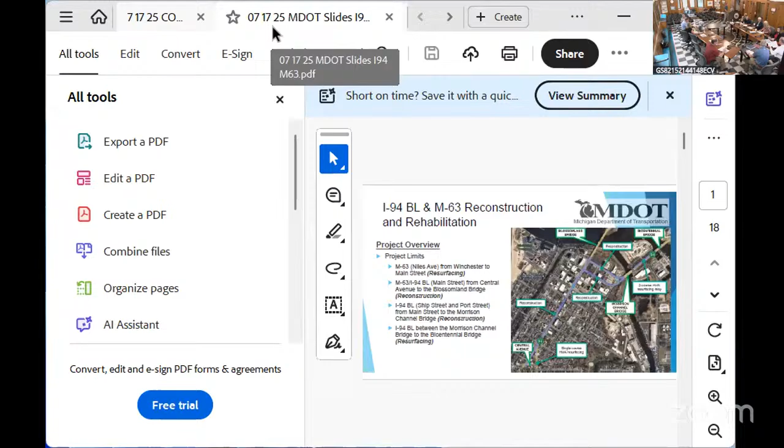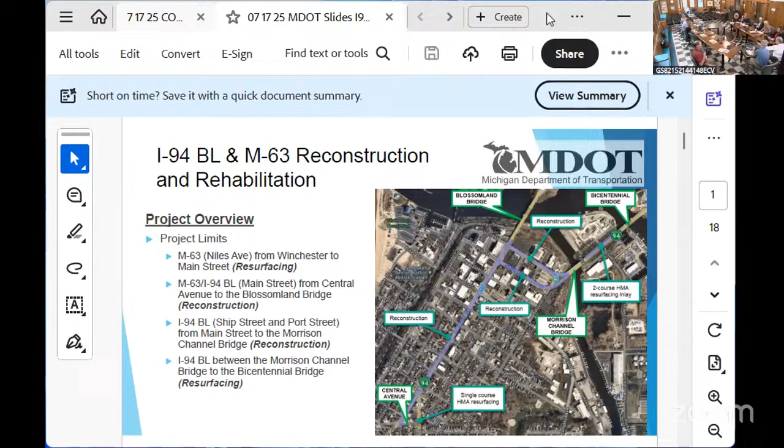Mr. Chair, while Mr. Smith gets ready, you all are going to hear about MDOT's planned reconstruction of Main Street outside this window. The MDOT team has been kind enough to include a variety of county departments through their pre-planning process and public engagement. Between myself, Don Trail, Carrie Smetanka, and representatives from the Sheriff's Office, we've been watching this design come together. This is an absolutely massive project that will impact county admin. It'll impact the courthouse, the Sheriff's Office, and even the Equalization Department.

As a result, knowing that there's so many impacts coming, Mr. Smith was willing to come and provide an update on behalf of MDOT. He'll walk you through what is being planned, and then my hope is that

All right, good morning. Thanks for having me. My name is John Smith. I'm the MDOT project manager for this future St. Joseph project that we'll be talking about today. I've been at our MDOT Coloma office since 2005. Started there as an intern, hired in full-time after college. Went to Western Michigan University. Born and raised in the Coloma area.

So despite what a lot of people think, that MDOT comes down from Lansing, says what we want to do and walks away from it, I was born and raised in the area and frequent St. Joe a lot for different things. So I have a vested interest here, as well as the other individuals from MDOT out of our office that are involved in this, who also live and work in the area.

So today I'm going to go through a high-level discussion on what this project is, give you a quick glimpse of what we've done on this project so far, a little bit of what we've been working on recently, and then where we're going in the future. Everything I'm going over today is what we've been rolling out in our public meetings as well as stakeholder meetings. It'll be a good overall refresh of the project if you haven't paid attention to it thus far.

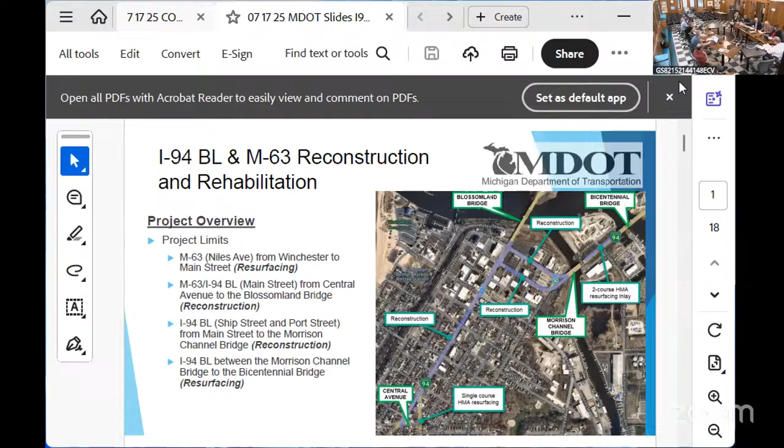Oops, find the right button to click here. Too many.

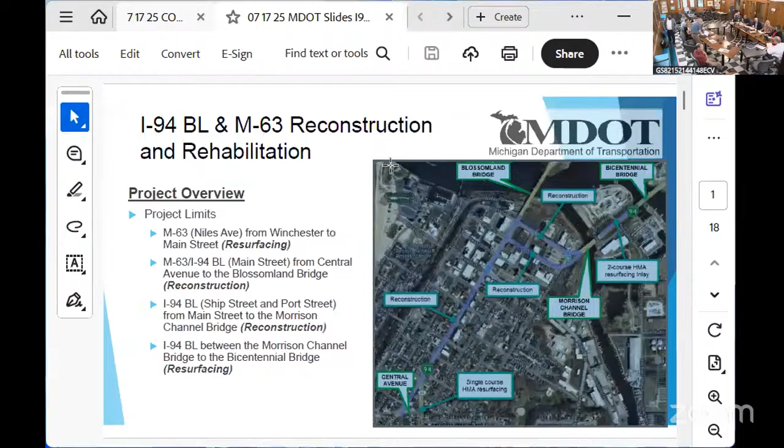So just before I get too far, I missed one thing. When I say reconstruction, we're replacing everything under the road as well: storm sewer, sanitary sewer, water main. We're doing operational changes, streetscaping, traffic signals, the whole kit and caboodle.

So again, we're pretty much going to be redoing everything from the ground up out here along Main Street. It's due. The concrete's 1950s concrete. It's lasted well past its prime. It's been repaired many times, and it's time to get into that underlying layer and also replace a lot of the municipal utilities as well.

But now getting into the schedule, I'm not going to get too detailed on this. This project's been ongoing in some form since basically early 2020. Had a discussion with City of St. Joseph at that point in time. They obviously have some vested interest with the roads in their community. So we sat down and said, where do you guys want to focus for the next project that we have with MDOT? Main Street rose to the top of the list. This is right through our downtown, we want to focus on that.

So at that point we did some real high level scoping, basically investigation, looking at what we wanted to do on that project, how much it might cost, when could we get it into our 5-year program. Between 2020 and mid 2023, kind of a hiatus time frame, got it in the program, waiting until we could get our funds obligated. At that point we split this project into 2 phases: EPE, early preliminary engineering, and PE, preliminary engineering.

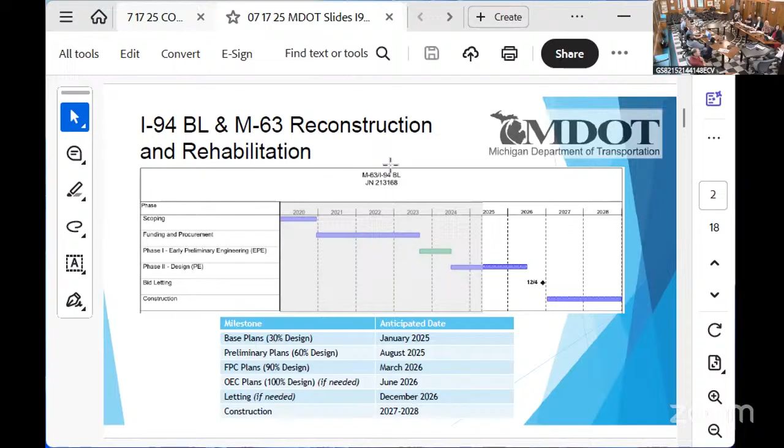Now, looking back at where we've been to see where we're going. That EPE phase, early preliminary engineering, started in 2024. That consisted of 3 advisory group meetings, 2 public meetings, and a public survey with 875 responses. My consultant team said they've never had a public survey for an MDOT project with 875 responses before. If we'd gotten 50, we would have been ecstatic. And all of a sudden it's 875.

So we actually had to cross-reference and make sure there weren't some weird AI bots going on. But it was all legitimate responses by people from the community, and a lot of them were residents that we got feedback from.

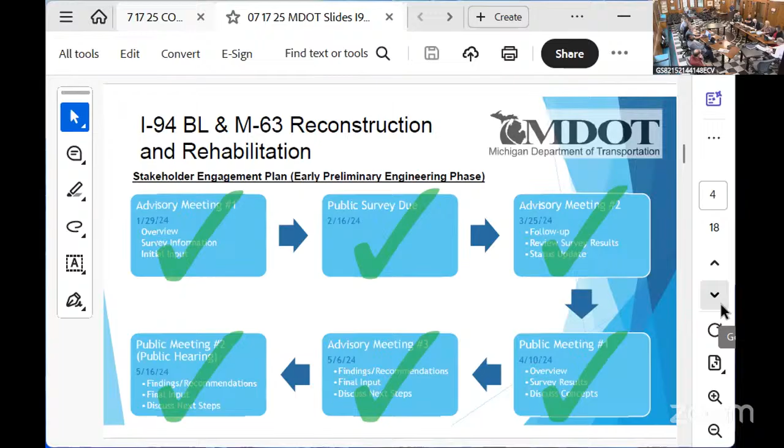Now going into our design phase, which we're in now, which kind of started in late 2024. Again, we're to today. We've done our base plans. That's what we call line and grade. That's 30% detailed. We're kind of laying out where different things are going to go. Following that, we had another advisory group meeting. Then, following that, our 3rd public meeting.

And then as we kind of got to that point in time, we were starting to think about, hey, how are we going to build this project? What's going to make the most sense, give us the best product, get good costs for us, different things along the lines of that. And so we actually advanced, that's why there's the little blue and red arrows there on the right side of the screen. We kind of advanced another advisory group meeting as well as a public meeting to kind of roll this out and show, hey, here's the options that we're looking at, and this is what our recommended alternative is.

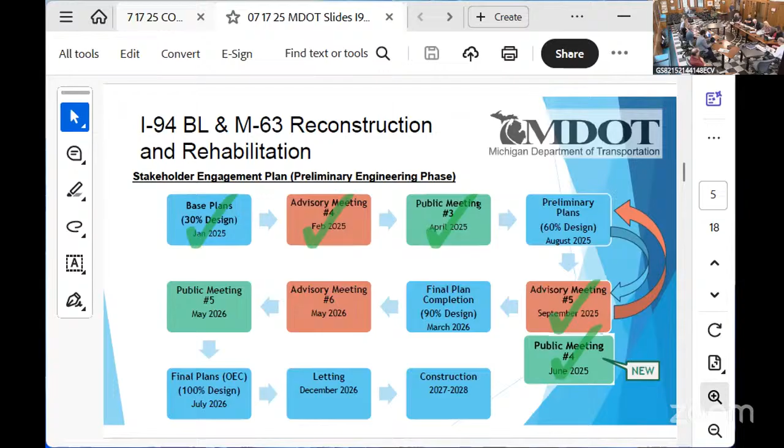Again, just kind of showing how things have progressed a little bit throughout. One of the big things that we heard in our survey that we really looked into was the safety of pedestrians and everyone that frequents this corridor, especially these pedestrian crossings. A lot of people are going from one side of the main street to the other. So we started looking at, hey, what makes the most sense as far as pedestrian crossings out here? As you look at it today, there's a lot of crossings that might be 50, 60 feet wide with no refuge in the middle of them. They're not at a signal, so they're not really protected.

So the one thing that we want to hang our hat on, we're going to eliminate any uncontrolled pedestrian crossings along Main Street that is not at a signal or does not have some sort of a refuge. That's where we feel that we can provide the safest crossings for people. And again, myself crossing a street is going to be different than somebody like my parents crossing the street, is going to be different than a young family crossing the street. So we're trying to look at that overall as far as what makes the most sense for all users crossing the street. So this was our initial graph that we're looking at. Okay, we're going to eliminate some crossings where we don't have them protected either by that refuge island or they're not at a signal.

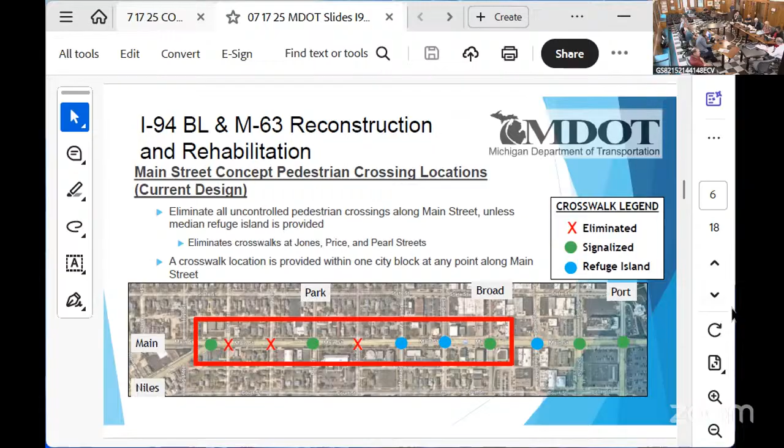Basically, we redistribute some of the left-hand turns out there. We can put some additional refuge islands, which, if you want to high level think refuge islands, it's like the median planters out here, but you have a crosswalk going through them. So somebody can stop part way and look the other direction and then proceed across. So redistributing through there, we end up allowing crosswalks at every crossing in some form or another, with the exception of Jones Street. And the only reason why we didn't look into that one further is that it is so close to the Niles Avenue intersection. There's only so many ways that you can make that one safe.

So that one we're actually going to be redoing a little bit. You'll see on the next screen, extending a little median through there to cut off some traffic movements to try and make that overall intersection safer. But other than that, you're always within a block of a crosswalk to get across the street. And they're always either going to be at a signal or have a refuge island there to proceed across.

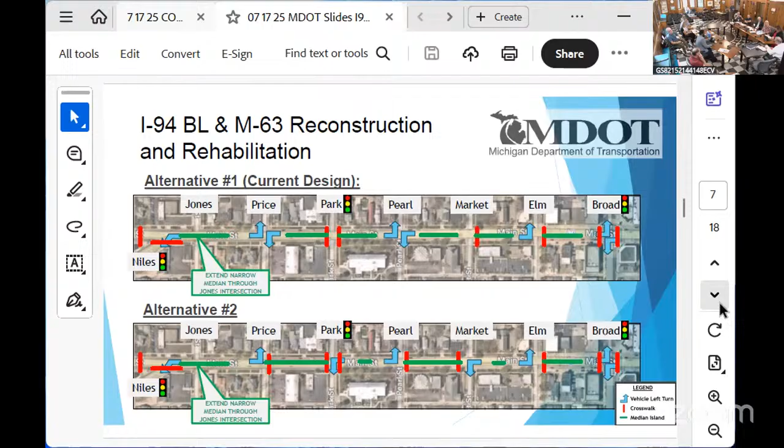So again, this is the Jones Street one, just high level, hitting on this. Again, the red line there, kind of right in the middle of the screen, that's showing the extending of that little concrete island all the way through. Now, people can't cut straight across Main Street there. They can't necessarily come from Jones and turn left to head either direction. But it again kind of helps with the overall operations of this.

The one thing that I'll add here with Jones Street as well, it's kind of in that top leftmost little box there, is we are actually going to be looking at adding an extra southbound left-hand turn on Niles Avenue. If anybody's driven through there, that left-hand turn gets backed up pretty good. Right now, it's kind of just hatched out because there's just extra pavement there. So we're going to be looking at adding another left turn there. So you'll have dual left-hand turns, kind of similar to what you have on Niles Avenue northbound, taking the right-hand turn on the Main Street.

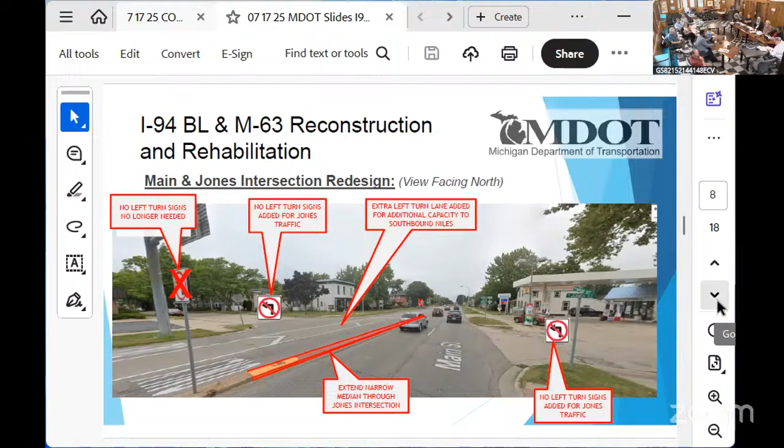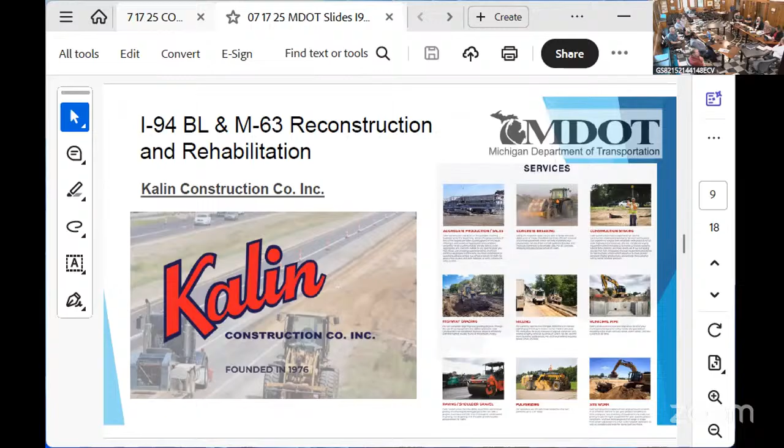Next, giving a plug for Kalin Construction. You're probably wondering, why is the Kalin Construction sign on here? That's because we're doing something a little bit different with this project, trying to think outside the box. Coming into this project, we're like, hey, this is going to be a very impactful job for the community. There's a lot of things going on. We're right by the river. We got 2 lift bridges, deep utilities that we're going to have to do. So the one thing that we did on this project that we don't typically do on road projects is we went with this construction management general contracting method.

And basically, the quick and dirty of it is we bring a contractor in during design and they're a part of the design process. We can get feedback from them. They can tell us, hey, this is how I would stage this work. This is an issue that we might foresee in construction. They can give us feedback on what the schedule might look like. Again, all those things, an ounce of prevention is worth a pound of cure. So there's a little bit extra cost to have them on during design, but it also will save a lot of things later on.

At the end of this whole process, we also have what we call an independent cost estimator on board as well. It's another contractor consultant that has worked on jobs. They're along the way as well, seeing everything that we're talking about with the contractor, providing input. They're looking at pricing, different things to make sure at the end of the day we're getting a good, honest price from our contractor.

And then at the end, we start doing the negotiation process with the contractor. And if we come to an agreement with the contractor, which is Kalin right now, we move forward with them right into construction. So the one that we've had on through all of design goes right into construction. Great teamwork and partnership at that point in time. If for some reason we can't come to an agreement with that contractor, then we put this out like our normal bid process, and Kalin can bid on it like anybody else at that point in time. And it would go to our normal low bid type process there. But again, having them on during design is worth its weight to get all that information up front.

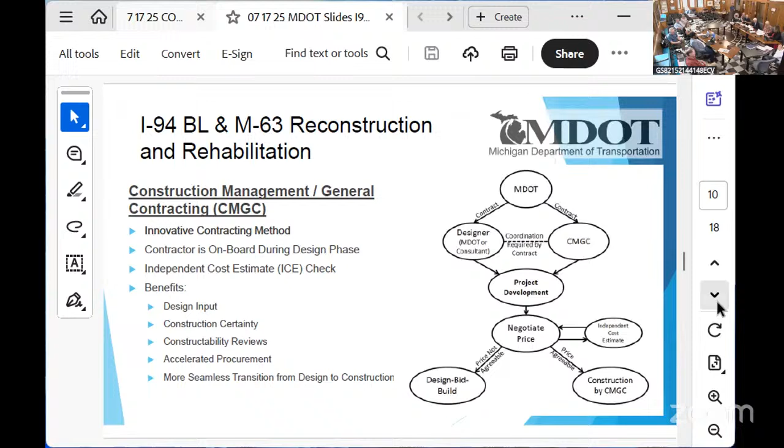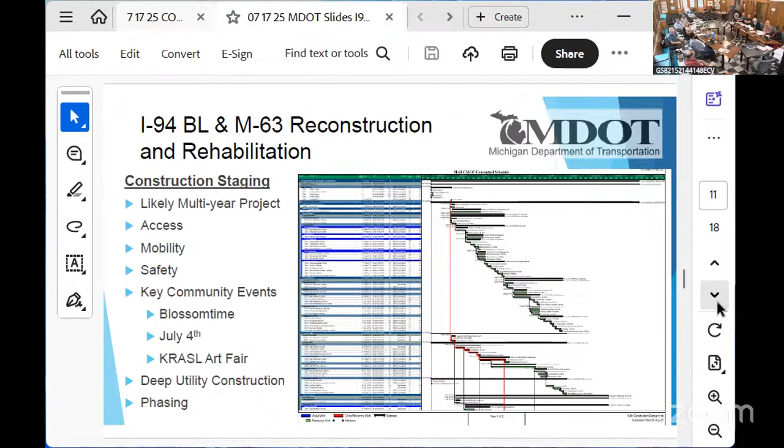So as far as construction staging goes, I'm not going to hit on all those bullet points there. But these are a lot of things that we're taking into account as we're looking into it. Again, right in the downtown area. Access is a big thing. Again, there's a lot of deep utility work that we're going to have to work through. How are we going to phase this to still provide that access? We have community events, how are these things to be done? These are a lot of the parts of the discussion that we've had as far as the contractor goes.

So the most recent public meeting that we had, the biggest part of it was rolling out construction staging. What was considered and what is our recommended alternative? So the next couple slides here kind of show the different alternatives that we looked at, pros and cons to everything in life, right? So alternative one was part width construction.

Basically working on, for instance, out here, we'd be working on southbound, maintain traffic on northbound, then flip flop. Seems pretty easy, right? It's good, but once you start thinking about the underground and sanitary sewer leads, storm sewer, water services, different things like that, it becomes a little bit more difficult. How are we going to get those across the road to the other side in an efficient way, making sure we got good quality, different things like that.

I mean, those are things that come up in our discussions, and we're looking at different options that we would have. Also, how far away is that work zone going to be from our workers? Obviously we want a safe work zone for both the workers, pedestrians, and motorists that are going through this area.

Also right now, as you all are aware, it's 2 lanes each direction, northbound, southbound. This would be taking it down to a single lane each direction, northbound, southbound. When the bridge goes up, Niles Avenue may become a parking lot at that point in time. You're also taking away the center left turn lane, and if one person tries to do something different and tries to turn left to make their life easier, it could back things up. So it's a lot of these different things that we're weighing there.

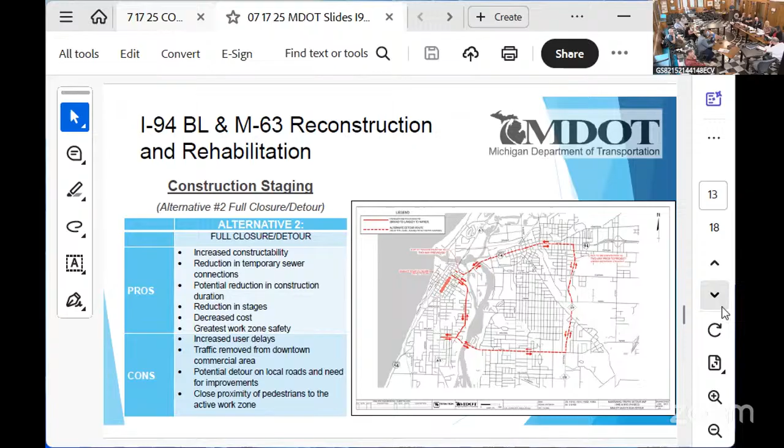And then the last one, this is very similar to that part width construction, is a directional detour. We can maintain 2 lanes of one direction of traffic, and then we would have to detour the other. Again, I think the pros and cons on this one are very similar to the part width construction one. You still only have half the roadway that you can work on at a time.

You're maintaining traffic. The bridge goes up. You may have more capacity at that point in time for having two northbound lanes, but it still may stack up a little bit. So, again, pros and cons there.

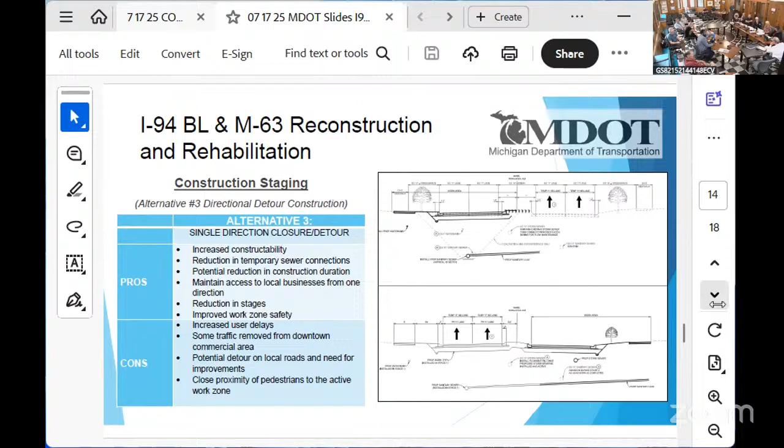So we'll fast forward. Overall, weighing the three alternatives that we had, part width, full closure and detour, and then the directional detour one, our recommendation is we go with alternative 2, which is the full closure and detour. Again, this allows us to shorten that construction from possibly 2 full construction seasons, which is what both alternative 1 and 3 would be, to about a season and a half.

And with that season and a half, we would also get into the downtown area, which we kind of identify from Elm up to the Blossom Land Bridge and Port and Ship Street there. We would get that done in a non-summer time frame, get that done during the late fall, winter, early spring, and hopefully get that done as quick as possible.

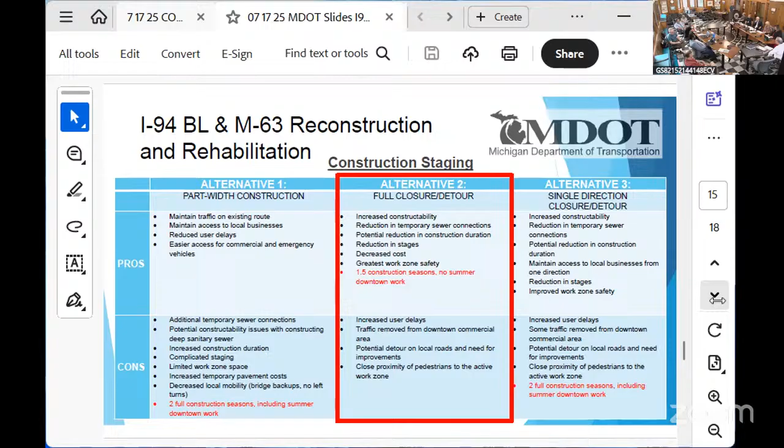So this is, again, highlighting the full closure detour in the different stages. What I want to focus on here is stages 1, 2, and 3. That is, again, the downtown area that we've designated as where there's businesses and people getting from one side of the road to the other side of the road for businesses. Our goal on this would be to complete all that work by Memorial Day of 2028, so that way it's open for business once we have a lot of the tourist traffic that comes into town, and you would allow that cross traffic right into downtown.

Then we would proceed southerly, in those various segments of 4, 5, and 6, completing the rest of the work in the more residential section that we've identified there. The big takeaway, like I said, is with full detour, we would be just starting in fall of 2027, so basically after Labor Day of 2027. And then we would be completing that downtown work by Memorial Day of 2028.

The part width or directional detour, we'd be starting basically, we say winter, but probably spring of '27. And that work's not going to be done until the following, like '28. It's going to take 2 full construction seasons that downtown would be impacted, even during summertime. It extends and amplifies the overall impact in that downtown area.

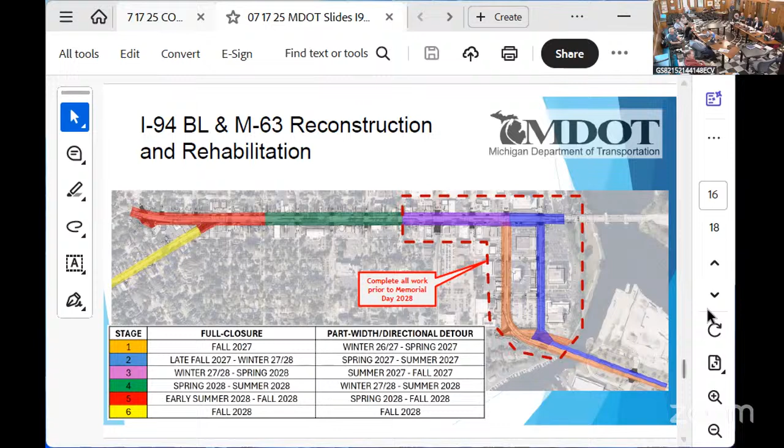So what to expect during construction? Everybody's driven through a work zone. We know how this goes. It's not the prettiest thing in the world. The biggest thing that we need to do is try and make sure we have access to all businesses at all times as much as we can. Again, being a downtown area, we'll have our construction staff that's going to coordinate extensively with the businesses.

There's going to be some rerouting of traffic, whether motorists or pedestrians. But we'll make sure things are signed properly so people are going safe directions and it's safe for them to travel. Driveways, we're going to try and minimize impacts, phase them a little bit, or if they have 2 driveways, we'll work on one, have one closed, and then flip once it's done. Water shut off work, sanitary sewer work, that's going to be coordinated with property owners. So, again, lots of coordination takes place by our construction staff once it is in construction.

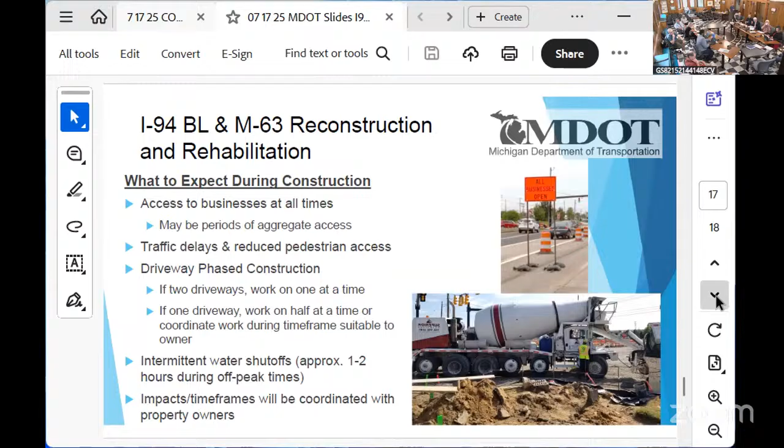So nearing the end of this part, at least. So next steps, we're doing a lot of right-of-way work on this, trying to identify where we're going to have impacts. There's a lot of utilities through this area, outside of just the municipal utilities that I discussed already, that we're going to be coordinating with to make sure that they're out of the way or in a place where we can work around. And we're proceeding towards a 60% design submittal.

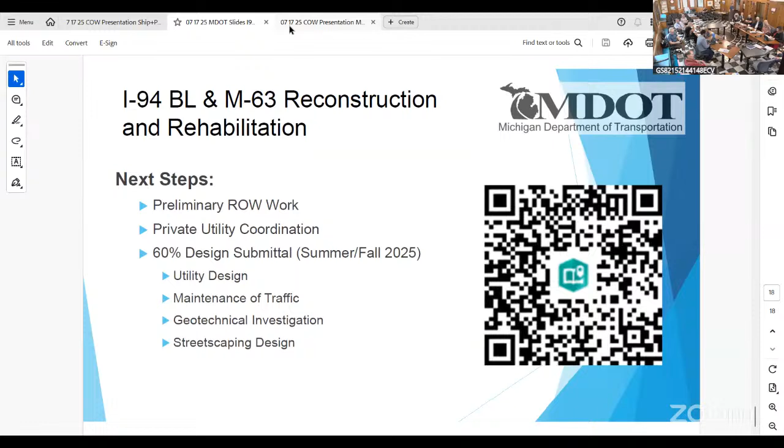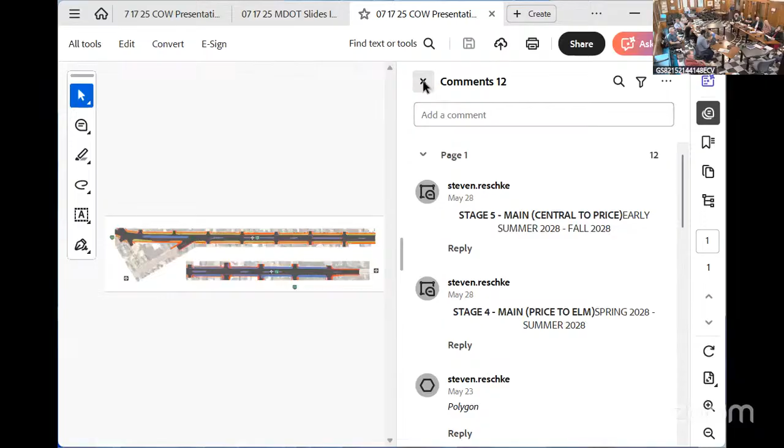Now, these are graphics that, blow this up a little bit, that I printed out for you today. Oh, geez, Louise, it does not like me right now. Okay, gotta change some sizing. It's going to be very hard to see this a little bit. I'll zoom in here and scroll through. These are very big maps, probably 100+ inches long. They're big roll plots that we've had at our public meetings. Sorry, this is painful. Okay, I think that's better. Find my little hand. This is not liking me right now. There we go.

So here are the roll plots that show the overall concept. It's more landscape architect-type drawings here instead of the regular design type drawings. But it shows you how we're going to be repurposing some of the area and how things are going to be changing. It also shows the different stages that we'll have, as described, segmenting through the project.

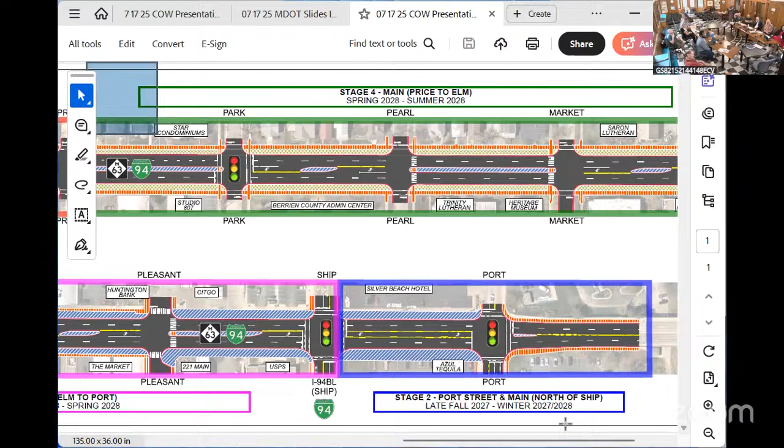So these two areas here on the bottom, like the blue and the magenta colors here, these are the areas that will be worked on. These will be completed along with Port and Ship Street prior to Memorial Day of 2028. Again, get all that work done. We're adding additional center left turn lane refuge islands. We're going to have a new signal at Ship Street.

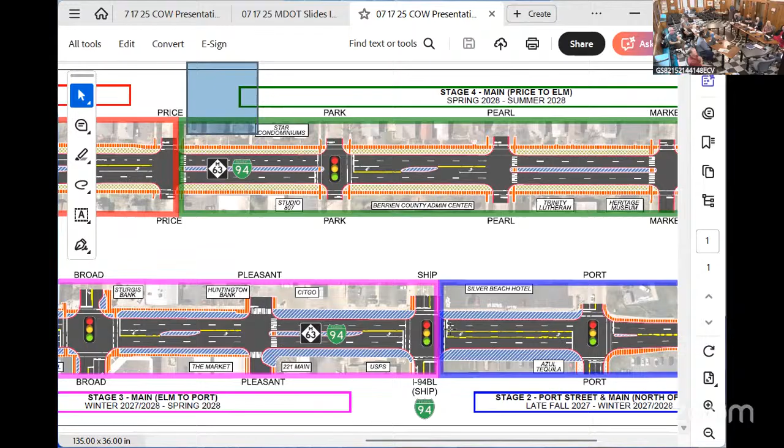The one big thing that we're changing on this that you'll see on the next thing is the operation of Ship and Port Streets. But overall, again, expanding the sidewalk areas. Right now, sidewalk areas might be 7 feet wide with light poles, traffic signs, planters, different things in that 7 feet. So now your usable space for pedestrians is maybe only about 4 feet. So we're expanding that area throughout the corridor, reducing some of our pavement width there and making it a little bit more of a walkable area.

And then go up to the top portion here. I'm just going from the north to the south, the green area. Now we get into the residential section. Again, expanding some of those refuge areas and the planting beds that we have. Trying to translate what currently is today on the south end of the project in the residential area to the north end. If you stand at Elm Street right now and you look to the north, it's a sea of gray, of concrete, wide open, turns into a drag strip almost when you're driving through there. Then you turn and look to the south and it's a lot softer.

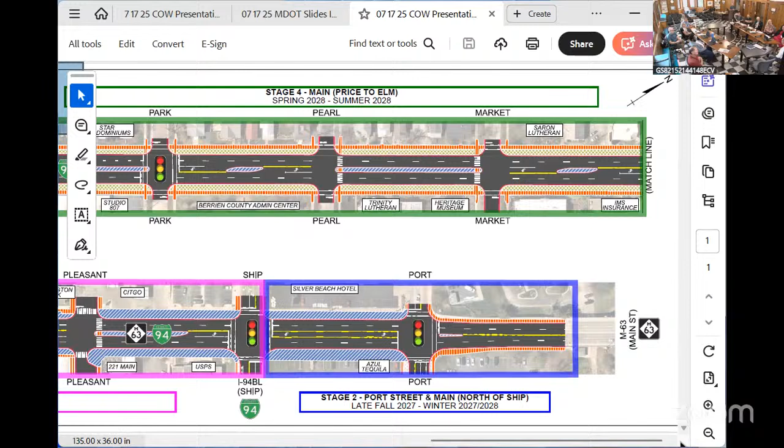You got those median islands. I think it feels a little bit tighter. People drive a little bit more appropriately. Again, that's why we're doing some of those improvements for safety purposes, hopefully trying to get people to drive the roadway the way they should be driving it instead of how they might be driving it today.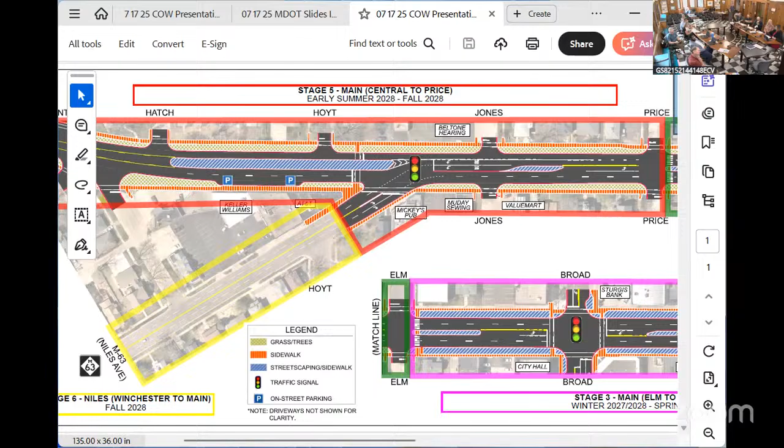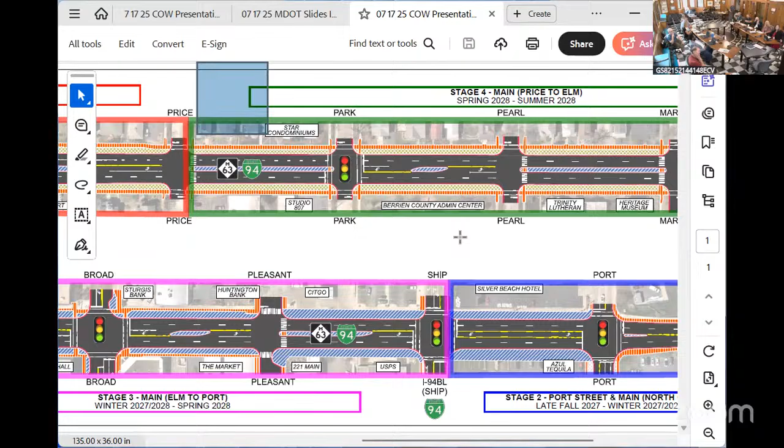So the one last thing on this one that I wanted to highlight was right in front of this building here for impacts. Oops, there it is. So Berrien County Admin Building right here. A little bit of the revisioning will be the left-hand turns as you come into here. So now you'd be able to turn right here on Pearl to come in. That would actually be taken away. For that left-hand turn, you would have to go to Park at the signal. Again, that was part of that revisioning that we looked at as far as balancing crosswalks and vehicular left-hand turns. But overall, along the frontage, we replaced all the utilities. Some of the trees that might exist here may have to be removed, but they'll be replanted with something appropriate as well. Now getting into the next one, if I can find that one.

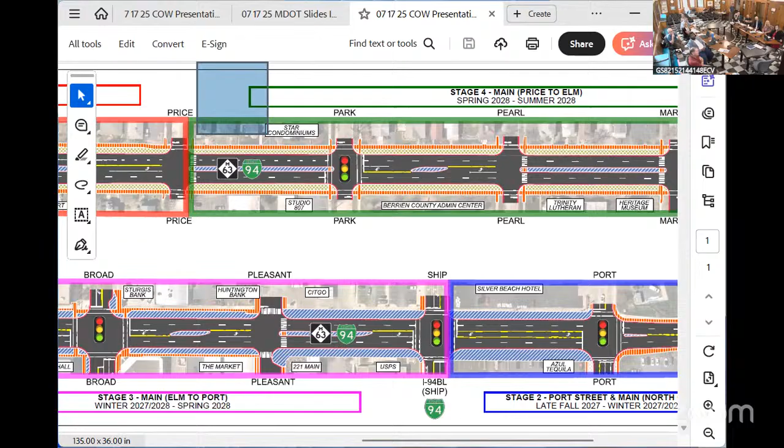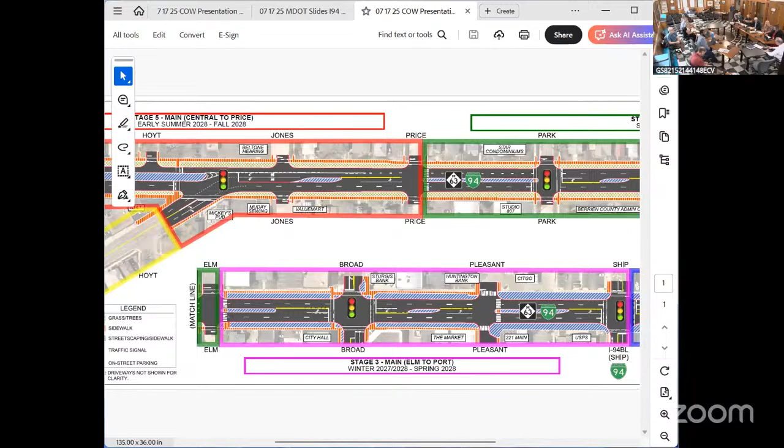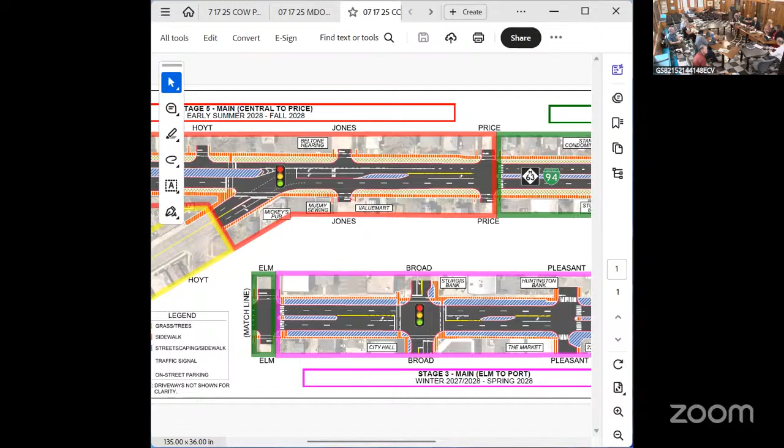Bear with me 1 second. This is the Port and Ship Street one. Hold on. It's always fun using a different computer. Sorry. Oh, you're good. Oh, Lord. Okay. I got it. It's hiding behind the little presenting bar. Okay. I was doing so good. Come on. Okay, there we go. I might have it. Aha. Sorry. Okay. There it is.

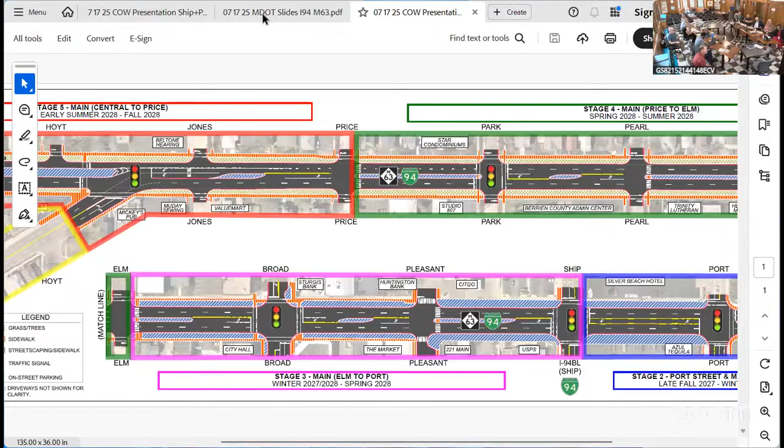All right, same type of drawing here for Port and Ship Streets. This one I just don't have to worry about scrolling as much. Obviously not as long. Again, this work starts after Labor Day of 2027. There may be some work that actually starts before that time frame, but the big focus we have on that, because it's basically right here, this early fall 2027, might actually start during the summer a little bit. That's for our storm sewer outfall into the St. Joseph River, Morrison Channel area.

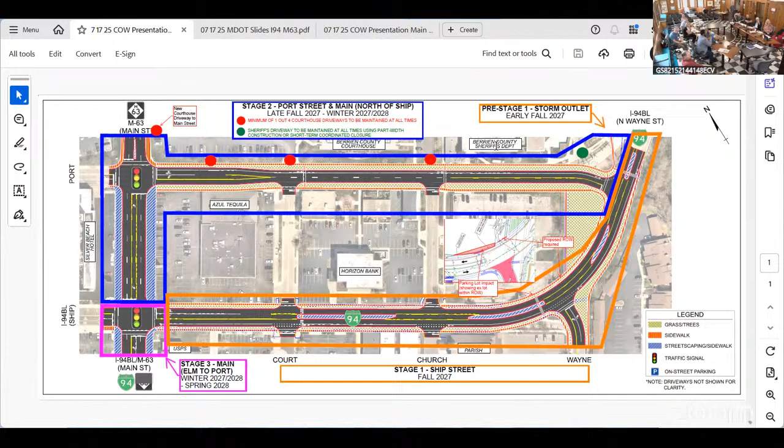But we would allow that work so that way we're not impacting traffic. That work would be taking place, maybe just needing a lane closure or something like that. But that's the big focus that we have here. But overall on this one, again, it's going to impact Berrien County properties a little bit more. And if I zoom in, hopefully I don't screw this up again.

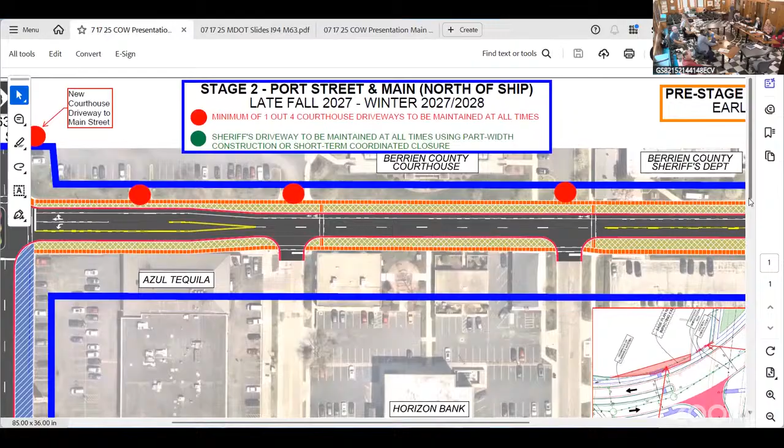So kind of going from west to east here. We've worked with Berrien County Courthouse, and I think it's Don Trail. He requested a possibility of a new driveway just on the north side of Port Street on M63 here. So we're looking into possibly adding that.

Also, there's three driveways right there between the courthouse and the sheriff's department. Again, we're going to work on staging on those to make sure we're not completely closing things off. Maybe one's closed, but then the other one's open. Again, trying to make sure we can still have business as usual coming in. It might be a little bit more time to get in and out just because we're reducing a driveway to one at a time, but it would still allow traffic.

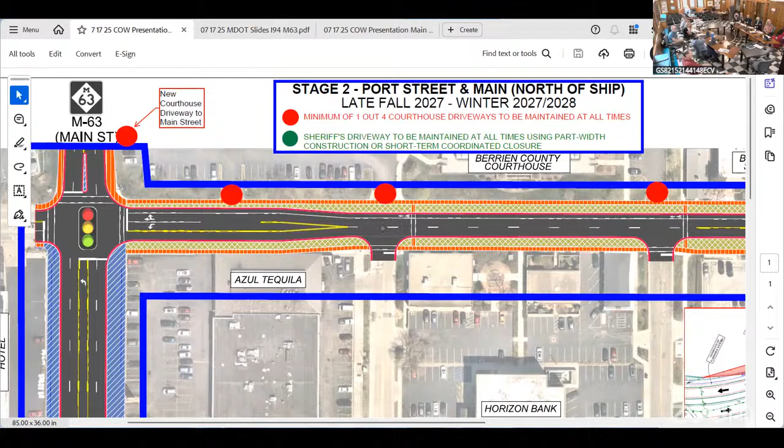One thing we don't have noted here is this little left-hand turn on Port Street right now. We're actually looking to extend that through the courthouse driveway right here to allow northbound traffic to go up and actually turn right onto Port Street and get in there. Because again, as I mentioned, both Port and Ship Street would turn to two-way traffic. Ship Street would remain I-94 BL proper, and then Port Street would return to the city of St. Joseph as a local roadway at that point in time.

Then go down here, I'll slide over here. Also, the Berrien County Sheriff's Department, their easternmost driveway, that one's been identified as one that has to remain open at all times. So on that one we'll be working hand in hand with the Sheriff's Department to make sure we always have access there.

No. You said thank you. I was like, oh, sure. I thought I got yelled at.

But that's one where we'll make sure we're maintaining access through there. Might be some part-width construction, but again, that'll have to be coordinated with them during construction. And again, we've had the contractor there, they're hearing this, so they don't have any surprises when they come into construction, hopefully.

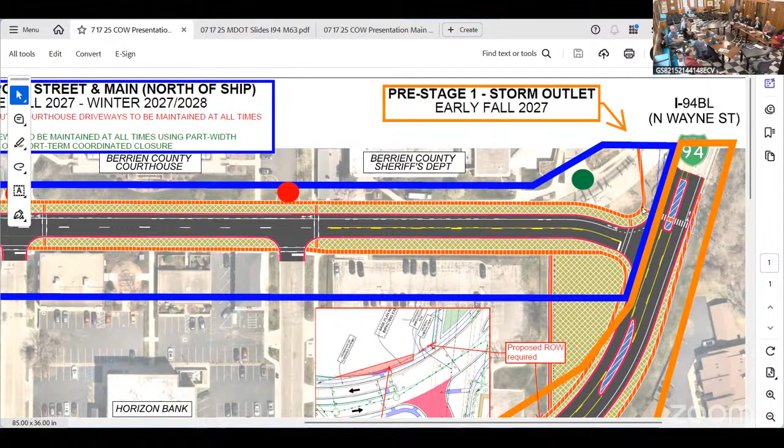And then lastly, looking right here by where the existing parking lot is for the Sheriff's Department, the county building and stuff like that, there'll be some impacts there. Based on our survey, we found part of the parking lot is in MDOT right of way. So we'll have to redo that. As part of our work, we'll move that parking lot back outside of our right of way there.

And then also right in the corner of existing Wayne and that parking lot there for Ship, we would need a little bit of proposed right of way to construct sidewalk through there. Kind of redoing that curve, trying to soften it a little bit. Everything gets pushed out a little bit. That's why we're getting into that parking lot, that's existing MDOT right of way. But we would be looking to acquire a little bit of proposed right of way there as well.

But again, for both Port and Ship Street, that work would all be taking place starting after Labor Day of 2027, and it would be completed by Memorial Day of 2028. All the MDOT storm sewer comes down Ship Street, then outlets into the channel there. Some of it's going to be very deep, so there's going to be a lot of work going on there. But I guess with that, that's what I had prepared today to go through.

I know in talking with Brian, I had mentioned to him I'd love it if we get a resolution of support from Berrien County regarding this project. Again, we've had a lot of good communication with Brian and other county staff regarding the different improvements that we have. We're going to have that continued coordination moving forward. But the more support we can get as we're furthering in design and then eventually construction, it's worth its weight.

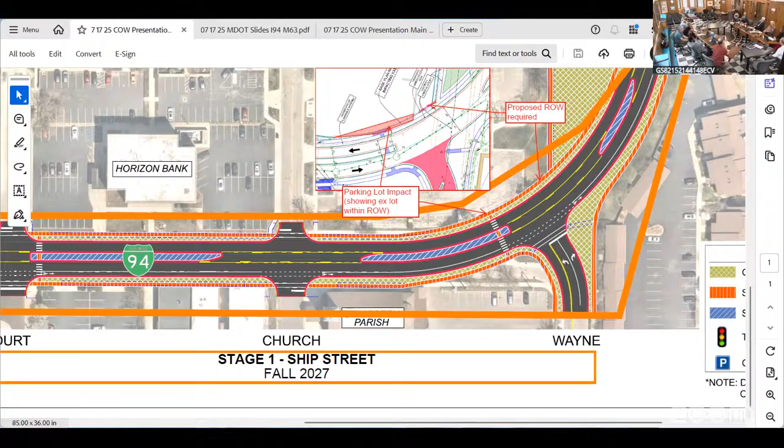And you are a Coloma Comet, is that right? Class of 2004. Okay, very good. Thank you. Dave. His father, mother, his grandfather, mother, all going back as far as I have, so I know. Wow. Their family's been full of fun. So I remember John when he was in school and his father coaching against him and with him. They're a good family and well known and recognized in Coloma. Oh, we do appreciate it.

Anyone have anything else? All right, let's get to committees and we'll be back at 10:30. Yeah, I was going to have one, but that's all right. No public comments? John. Are we not in public comments?